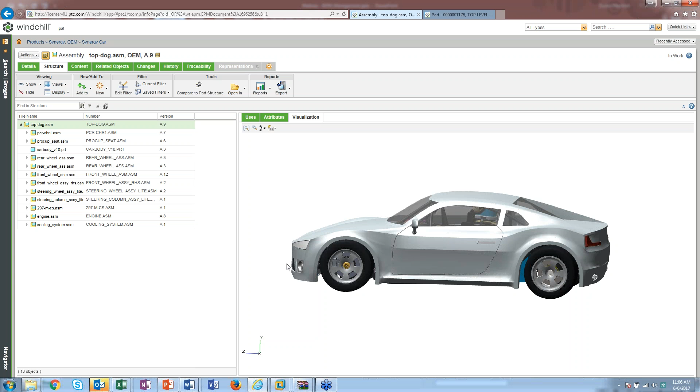The first thing we're going to look at is the visualization piece. This is run on Creo View, so you can see your parts published inside the Windchill pane here. Very useful for downstream users or engineers who want to know what part is associated to what name, since sometimes these names can get non-descriptive.

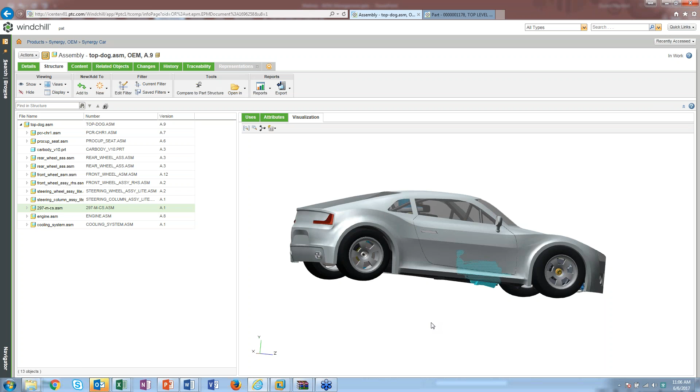So you can click on these parts and see them inside the actual visualization as you go through. Vice versa, you can click the parts inside the visualization and it will highlight inside the structure itself, making it easier to navigate and figure out which part is where and what it's tied to.

This can of course be put into the new Navigate app through Windchill, which we've talked about previously and can showcase in a later demo. This makes it a lot easier for downstream users to access your structure and see what you're talking about. So a few things you can do inside the CAD structure.

I want to highlight here that this is just the CAD structure - nothing to do with the WT part structure and some of the later advanced features you can do with that. But we can do some simple things from the CAD structure.

The first thing I want to show you is how to generate a report. The reporting capabilities inside the CAD structure are a little more limited. The two reports you can create are a single level report, where you just see the top level assemblies - this top dog assembly with its major parts beneath it.

Or we can do a multi-level report, which is something we might consider as we start to talk about exporting to an ERP system, where we can see not only the top assemblies but all of their children underneath it. We can export that, and I'll show that a little later in the actual WT part structure when we have a bit more data built in there.

But that's a quick way to start exporting this stuff into the format we need. Alternatively, you can also export just this list into multiple different formats, whether it's a CSV - pretty common for importing into an ERP system - or an Excel spreadsheet, XML, PDF, whatever you need. It can be done right on the spot here.

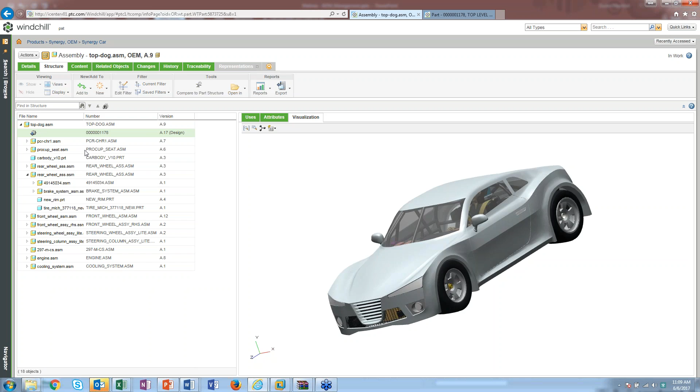So the WT part is something that you would have to mature into. Most everyone we've come across is still working on basic vaulting, check-in and check-out of their CAD documents.

They haven't gotten to the level yet where they've matured into a WT part because this hasn't been necessary, or their business hasn't seen a need for it yet, or they don't quite understand what it does. So a WT part, or Windchill technology part, is an item master or material master in an ERP system.

The CAD document is one of those components inside the WT part that describes the part number. It's not the only one, though. This is really valuable if you have multiple non-CAD items tied to your part number, such as specs, quality alerts, other graphics or images. It contains all that information you need inside of one part number.

So if you have manufacturing entering Windchill, they could search up the number, and then they can find all the related documentation on how to assemble or build this component. So everything is tied into one part, and it makes it a single source of truth. Everything is in one spot.

There's no documents or floating Word documents out on shared network drives, or calculations, maybe Mathcad sheets that you have that you want to describe by your part number with. That's not floating around. That can be all tied into a WT part.

And the benefit of that, I'll show you that now, inside the structure view of this. But first, let me show the differences in terms of visualization between the CAD structure and the WT part structure, which we just saw. So from the WT part structure here, we have a little bit more capabilities in terms of visualization.

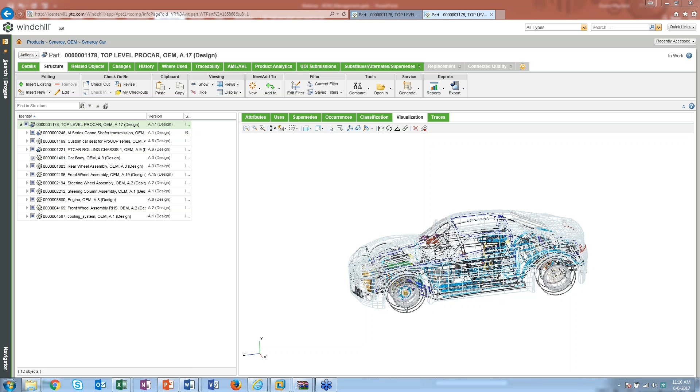We can make annotations, we can do markups, we can view it in a wireframe, or we can remove hidden lines. Let me close that real quick. So we can view hidden lines, we can see in a different kind of format. We didn't have this capability inside the CAD structure.

We can also make annotations. We can measure certain parts of the radius of this wheel well here, and we can make annotations on it and save it to our part.

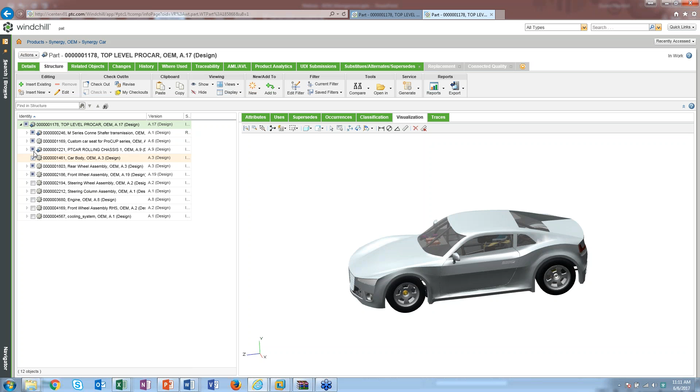A little bit more than that, though, we can actually start to hide components, kind of like what you would do in CAD. We could hide components based on what we would want to see and what we don't want to see. So as I click through this here, let's go ahead and hide this chassis and the car seat. I'll get the car body away here. So I want to just expose maybe the front wheel assembly. Maybe we could just keep on the transmission there. So I can start to go ahead and hide components that I don't want to see.

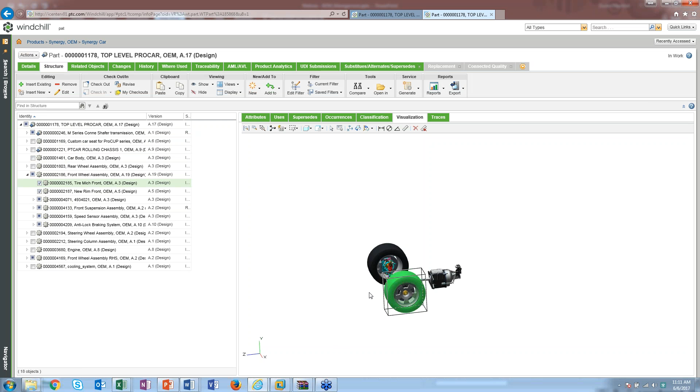Same capabilities as the CAD structure. I can click through this and it'll highlight where inside the structure it's located at. So that gives a little bit more flexibility as well. But we can start hiding things, and see different views of what we normally couldn't do inside that CAD structure. So again, really useful for downstream users, really nice to know what you're clicking into and getting into.

So the one thing I wanted to highlight that's different about a WT part structure is the fact that you can tie these associated documents to your part number. So if I go to show here and say let's show all documents tied to this front wheel assembly - not only does it show, let's also show the CAD document as well. So again, this front wheel assembly will have a CAD document to it, it will have a drawing to it, but now it has a torque spec and quality alert to it.

So just from this one part number, we have 4 different components. In the CAD structure, we'd only have the CAD document tied to it. So again, already we're seeing 4 more things tied to this part than we could do in the CAD structure.

And that's just the process of maturing your design process into WT parts, which is included inside PDMLink. It's pretty straightforward to start creating these parts, but it's a little bit more difficult to start adopting it as the source part that you want to go to when you're trying to look up information.

With this, we can obviously get more reports and different report types. If we go to reports here, you can see a lot more than what we had before. We only had that single level BOM and multi-level BOM. Now we have a single level BOM with notes, a multi-level BOM with maybe approved manufacturer list or replacement parts, and we can have manufacturer parts in here.

So now we can start to export things with all the documentation that we need. I'm going to quickly show you how to do one of these reports here, just so you can see what the user interface looks like. So right now we see all the parts that come with it, all the documentation.

If we go to actions, we can just export this to maybe a CSV file. This can later be used inside of exporting into an ERP system, or formatting in a way that gets into an ERP system. So this is the first step you would take in order to do that. We can go ahead and open that, but I'll save that for a later time.

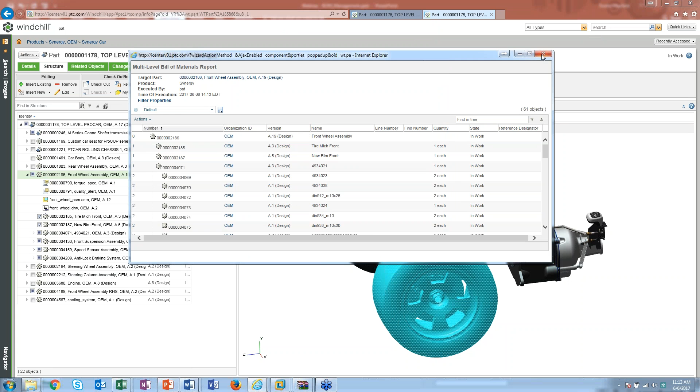Okay, so the next thing you can do, and I think this is extremely valuable, especially for maybe engineering managers or top-level CAD users that want to start utilizing some of those top-down design techniques - we can build out components from inside the structure here. We can start building out our structure without needing to build CAD documents around it.

So say we have an idea of what this structure should look like. We can add numbers, we can add existing parts into here, or we can create new parts. So for example, let's say I want to add - what's a good one to add? What if we want a software package here? Maybe we want to add something that's like an autonomous module. Since this is a car, let's look for the autonomous module.

So we're going to go ahead and create a new part. We'll call it the auto module for autonomous. Create a new part, and we'll walk through these steps here. So instantly it'll pop up, it'll check out your part, and it'll pop up this new part creation dialog.

Let's make this a software part. This is going to obviously be a software package here. We can go ahead and do the name. Let's make this view inside of design. And we can obviously associate this to whatever we need - different life cycles - and we can put some plant identifications in here. There's a few things we can do in here, but we'll just keep it really simple.

Just create a software part. Now we don't need a CAD document because obviously this is a software package. So we can hit finish. And as you see, a new software part was created down here.

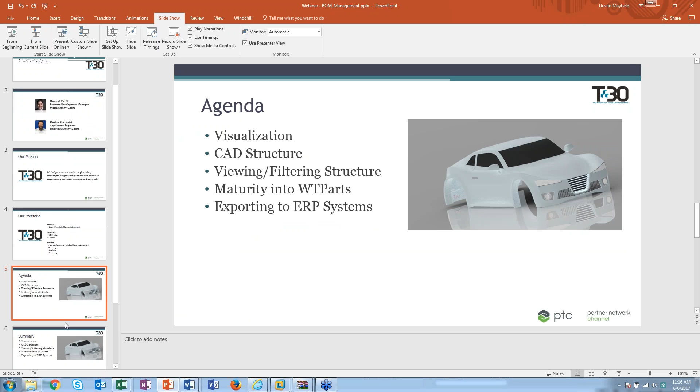So with that being said, I'm going to go back to our presentation here and summarize what we discussed and talked about. Let me switch this around.

So to summarize here, we looked at the visualization for the CAD structure and the WT part structure. Visualization is very powerful—that's probably one of my favorite parts of it, because this can be used inside of PTC Navigate. It enables downstream users to easily see your structure and what part you were talking about. If a manufacturing guy goes in and types in a part number, whether in Navigate or inside Windchill, they can pull up the visualization of the structure and the part, so it makes it a lot easier to know what they're talking about.

We looked at the CAD structure, very similar to what it looks like inside of Creo. We talked a little about how you can view and filter, and you can see different documents or replacement parts, and the associated documents to it.

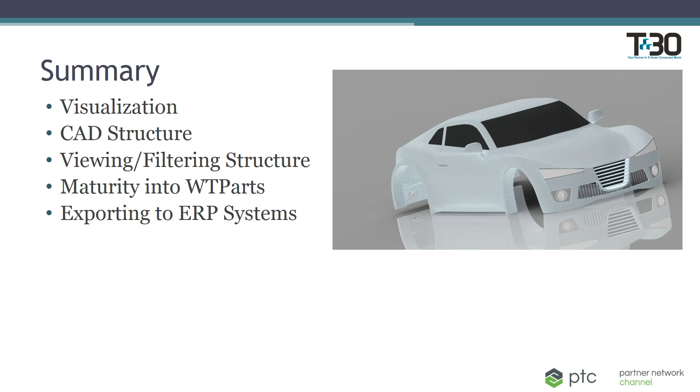And then, of course, maturing into the WT part—that's a big step for a lot of people, but it's a very important step, and it allows you to have this structure capability. We also talked a little about exporting to ERP systems. The first step is to maybe export your multi-level BOM with your manufacturing list or whatever you need into a CSV format, making sure that format can be used inside your ERP system. That's one of the first steps you'd take to get to that level.

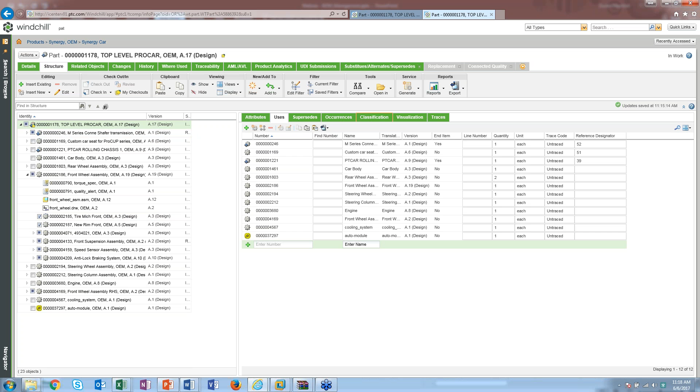So let's go ahead and get this view back up here. I'm going to go into my filter and hit Edit Filter. Now from here we can filter out our BOM in a lot of different ways—very, very useful. We're just going to keep it simple: I'm going to remove the latest in the design working state, and add a new one with a release state. Okay, and from there we just hit OK.

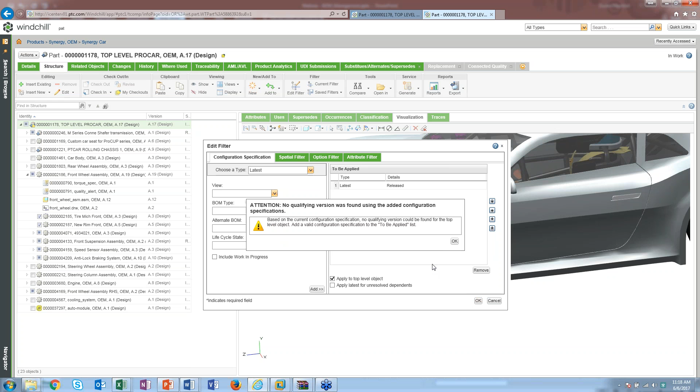Let me make sure that... let me see, maybe I did that incorrectly here. Let's see. If I can't show this, I want to at least show the concept on how to do it. You can view it from a different state. I hope I set this up correctly so we can see released parts here.

Okay, well, I'll have to—we can send out some information on how to see the release state. This is how you would do it though: you go to Edit Filter, add the release state there, and it will filter it down. You'll see the parts that are still in work, and you'll see the ones that are now released. I apologize I wasn't able to show that, but we can send out information if that's something you're interested in.